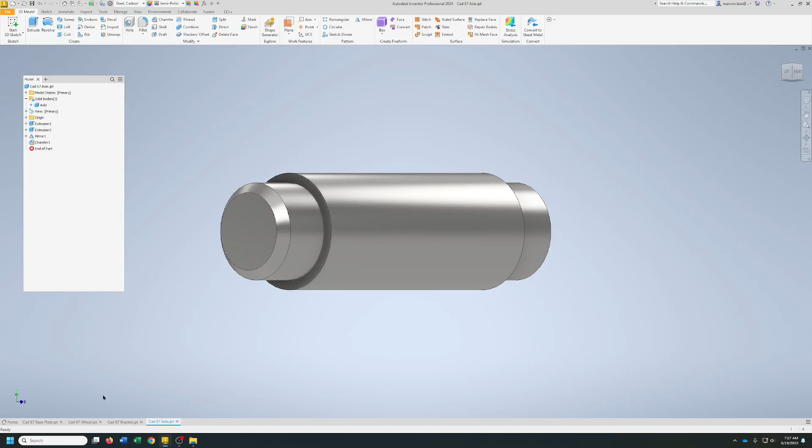I'm pretty new, and this is all metric, okay? So you need to do that, and we're looking for standard millimeter or IAM, which is an assembly. So we'll create that assembly.

Right now it's called assembly 1. Let's go ahead and save this, and we'll call it CAD 67. All right, so it's saved as CAD 67.

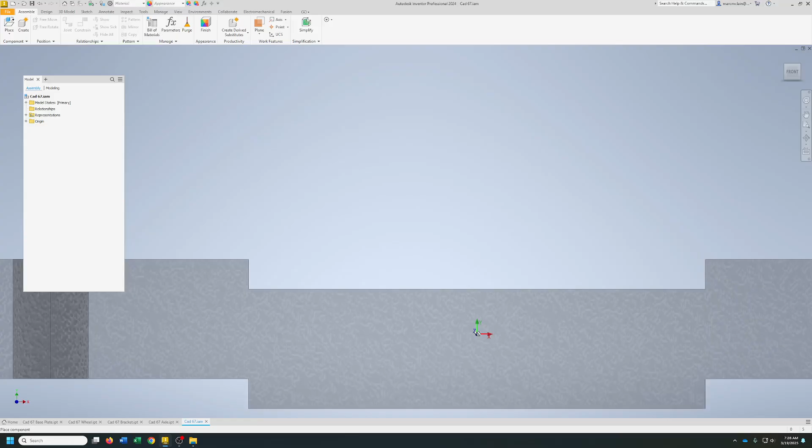Now we're going to place. Pick that, and the first thing we want to do is go back and look. See, I've got them all listed. You'll notice each part has a number. Part 1 is the base plate, so that's the one we're going to bring in first, right here. So we'll just open that and place it. And there it is.

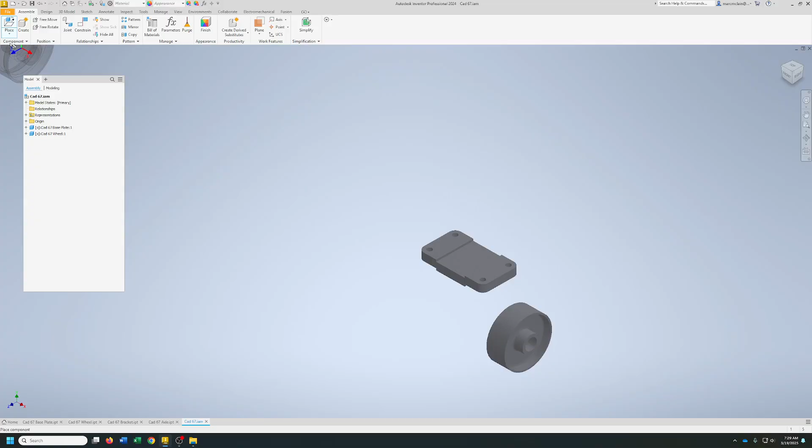Now we'll hit place again. We'll get part 2, which is the wheel. And we'll place that, and so on until we have all our parts in. Now you need 2 of the brackets, and then the axle. And there's all our parts.

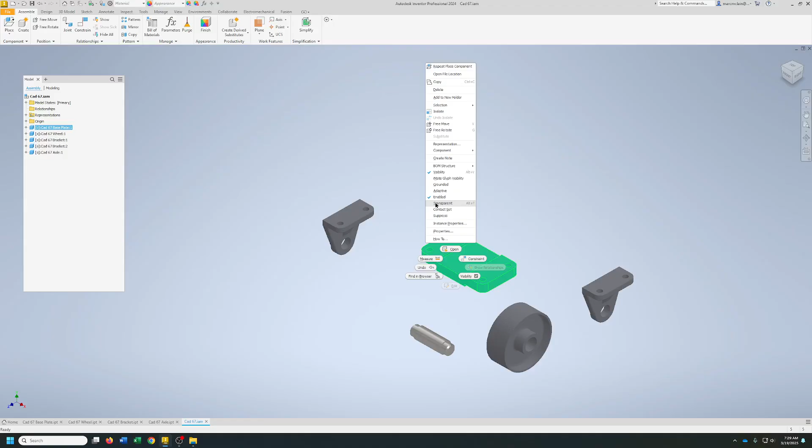Now your first part is where everything's going to attach to, so we're going to pick that, right click on it, and then grounded is what we want. What that means is this part will stay right there, it does not move, does not go anywhere, which is exactly what we want.

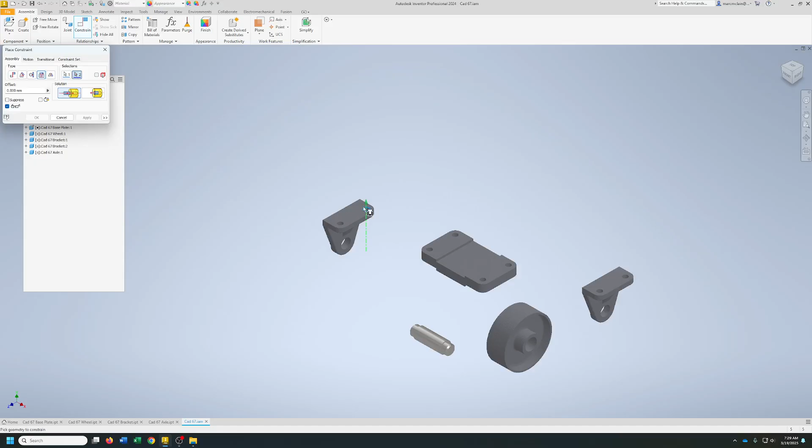Now we're going to attach this to here. Constrain, and we're going to use an insert. Pick the parts you want to move, then pick where you want to move it to. So we want that insert to go right there. And there you go, now we're going to apply that.

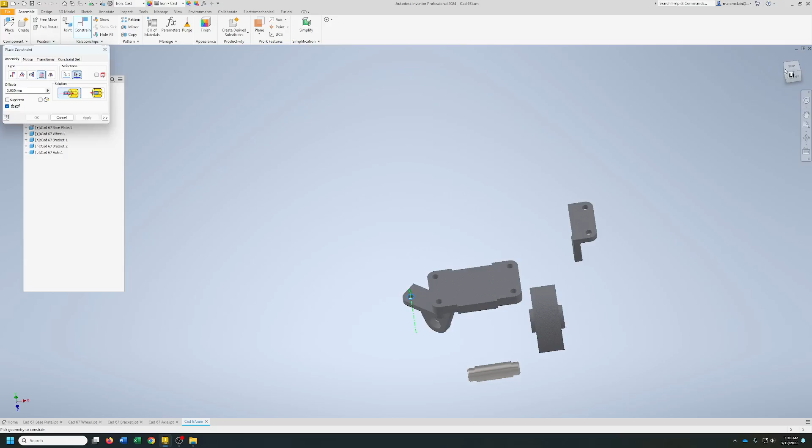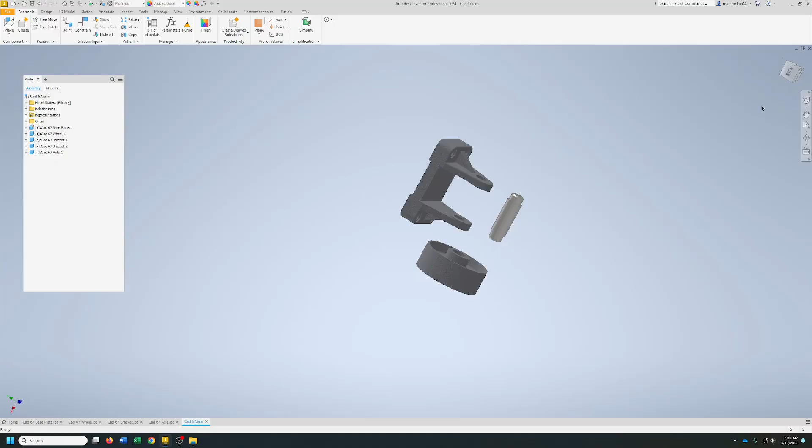See, it'll turn around that spot. All right, so we're going to do the other one to that side. Now we want this one to go the other way. Turn that out a little bit so that I can get to the hole. And there we go.

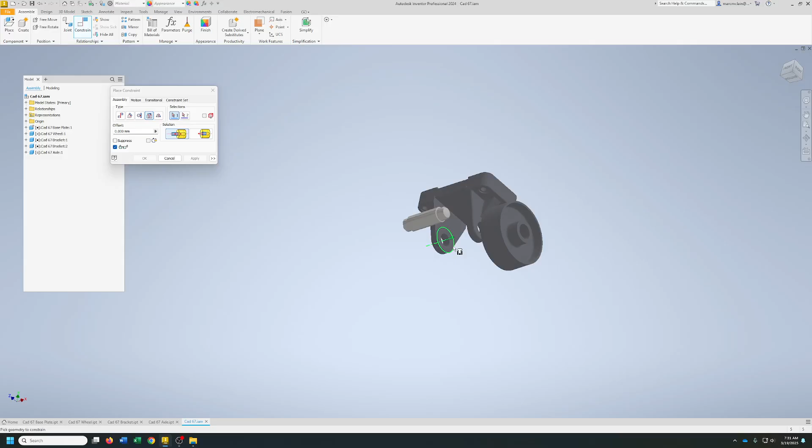Now we got to get this here. All right, so let's do a quick inspect and measure.

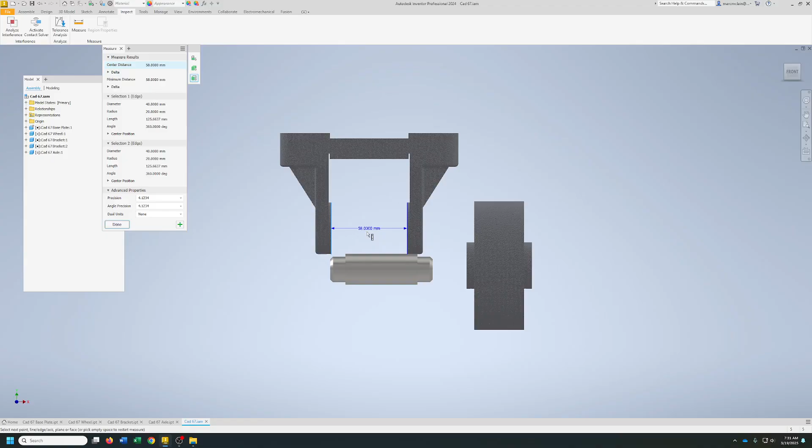That's 58. Now this is 55 from here to here. So that's a difference of 3, so it's going to be 1.5 on each side. That's important because we're going to have to do an offset.

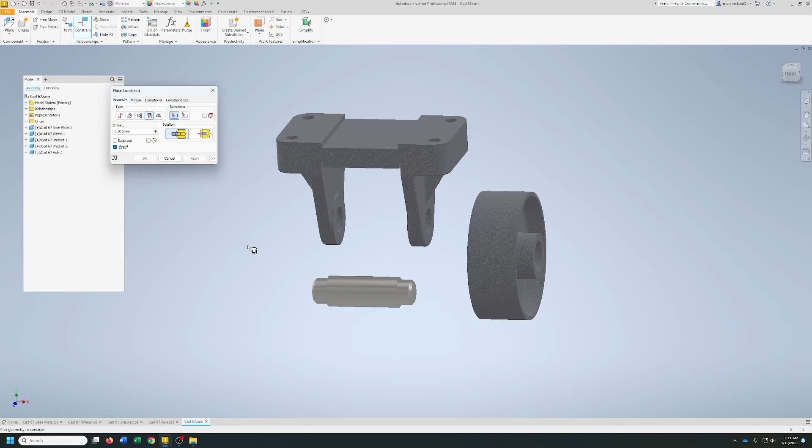All right, so back to assemble. I'm going to pick there, and then we'll pick there. Offset's going to be 1.5. See how I scooched it over a little bit? We'll hit OK. Now that should be, yep, right in the center.

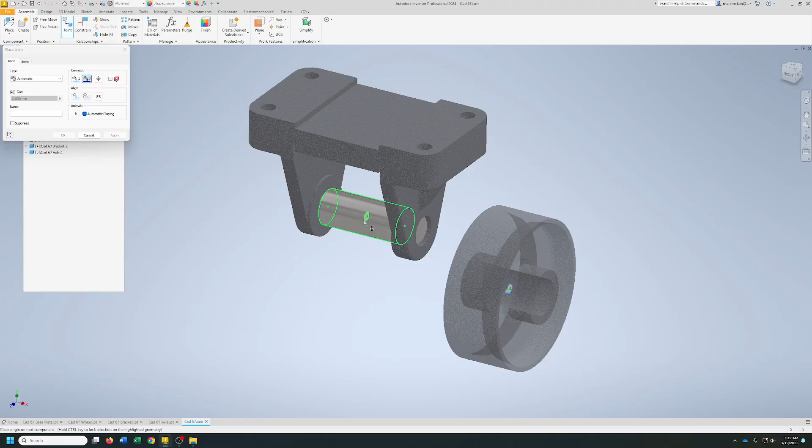Now we got to get this in the center of that, and the way you do that, we're going to use joint. Try to get that middle one. Oh, come on. See how it's highlighted? And then just apply. All right, and there's your part.

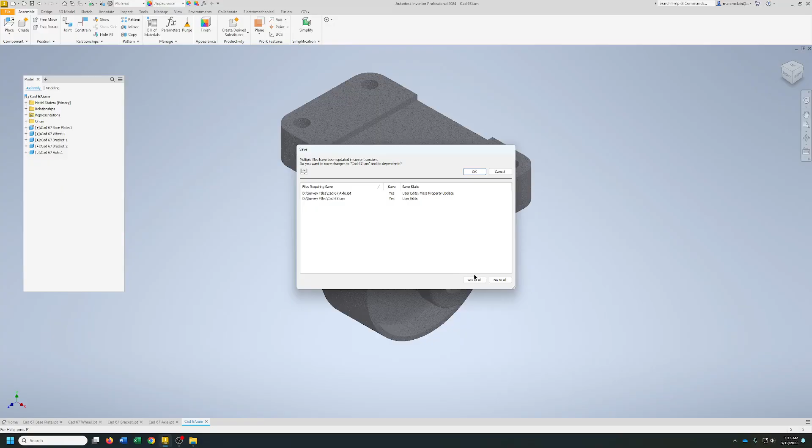Everything's all together. All right, so we'll save that. Make sure you save everything. Yes to all, any user prompts or anything for all the pieces and whatnot. So there's that. Now we got to lay it out.

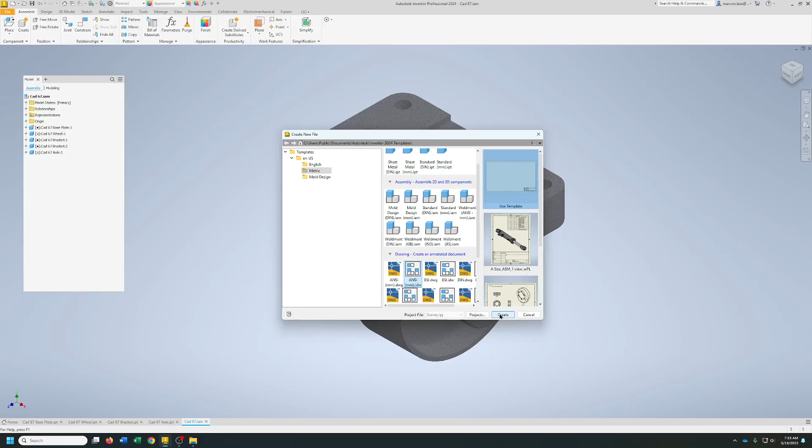What you want to do is lay out each part individually, and also lay out the whole thing. Once again, metric, right? And it doesn't matter that one or this one, either one works. All right, so let's leave it big for now.

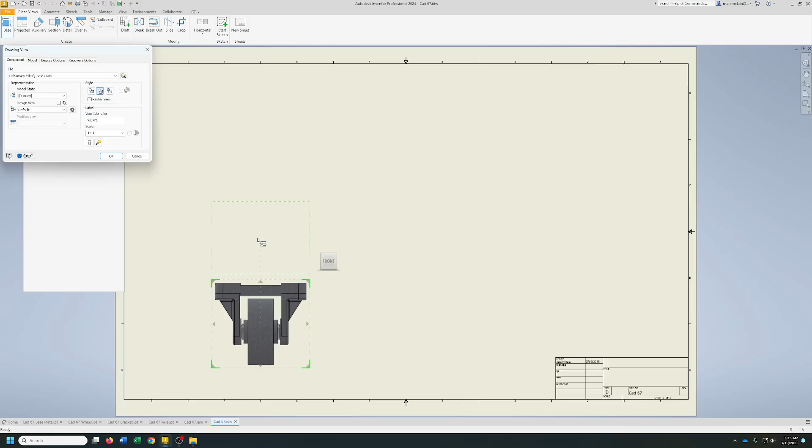I'm going to go ahead and save this, CAD 67. Base view, let's get this bad boy on there first, okay? Now I want the top view, and you'll see why in just a second.

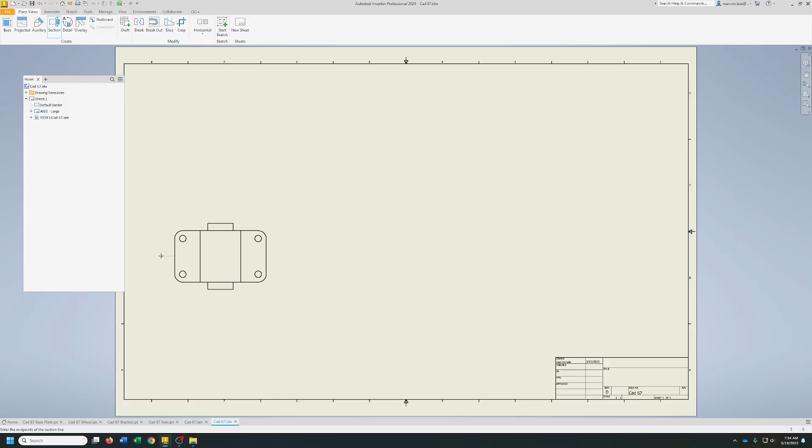All right, let's pull that back up a little bit. There we go, so there's my section cut. All right, so there's my three views. Now I don't want this in here, so I'm going to hide that bracket.

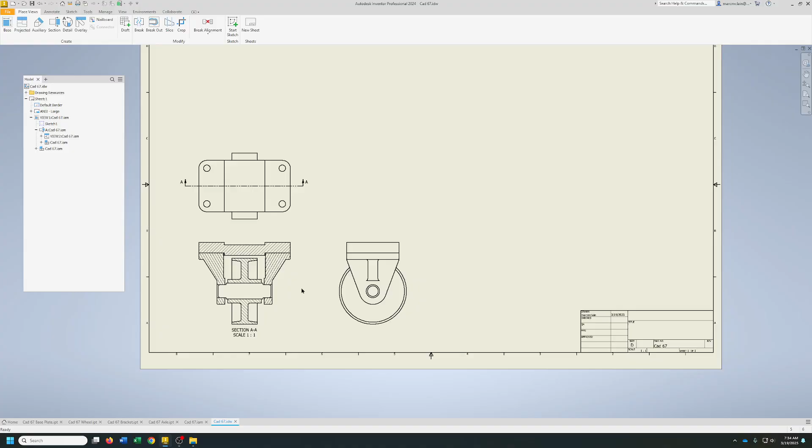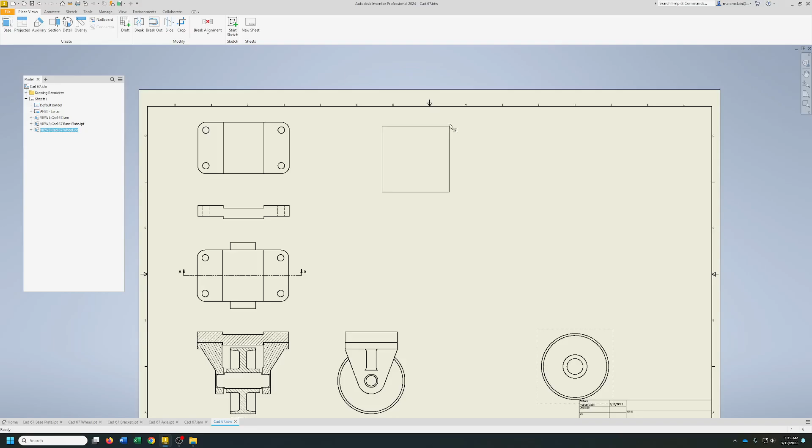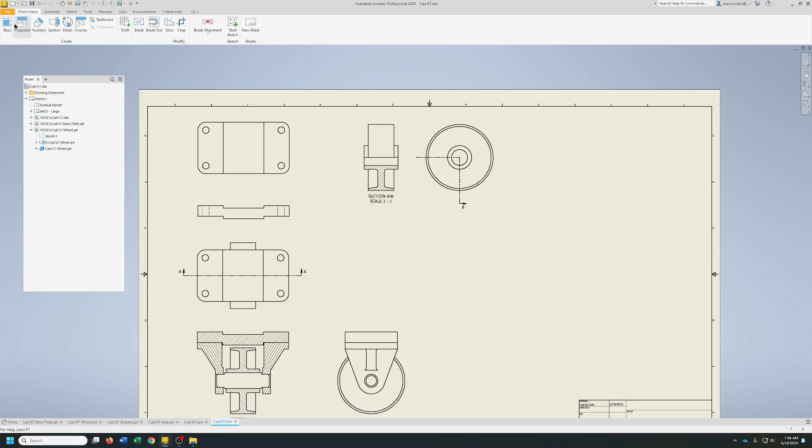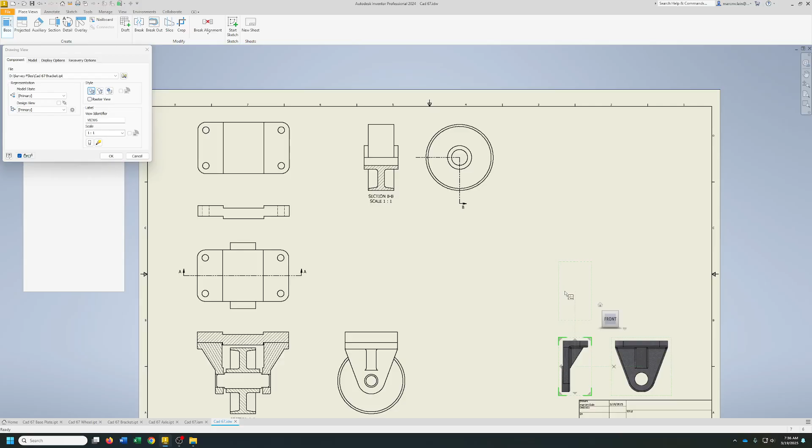All right, so now there's all my parts. There's those. Right side. So that'll allow us to get all these like we need to. So we got the base plate, the wheel, the bracket is not the last one, but bracket is next, and the last one we're going to load up on here is going to be the axle.

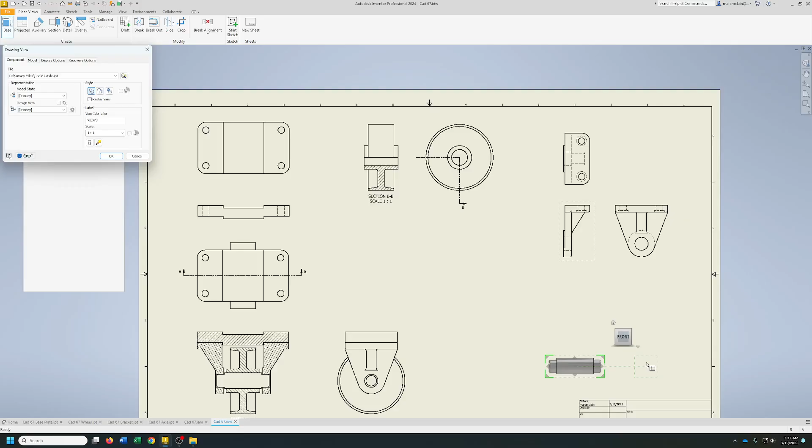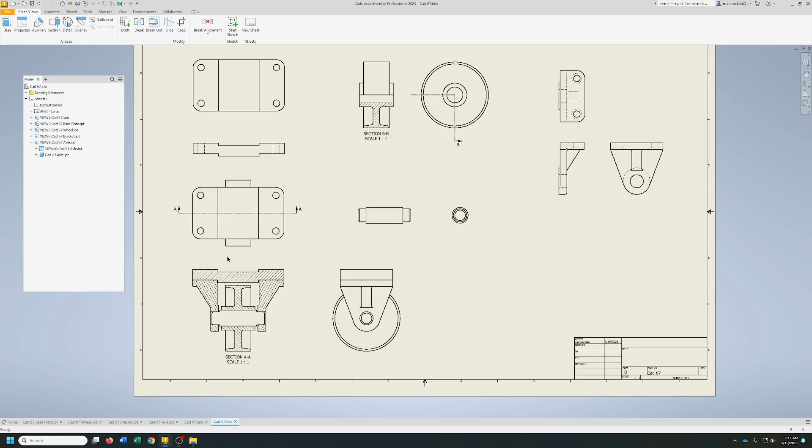All right, save that real quick. Now I need a parts list, so I'm going to come over to annotate, parts list. I'm just going to pick this. Hit OK, hit OK to enable the BOM view. Pop your parts list right there.

And as you can see, it tells you what the item number is, how many there are, what the name of it is, and you can put a description if you'd like. And there they go.

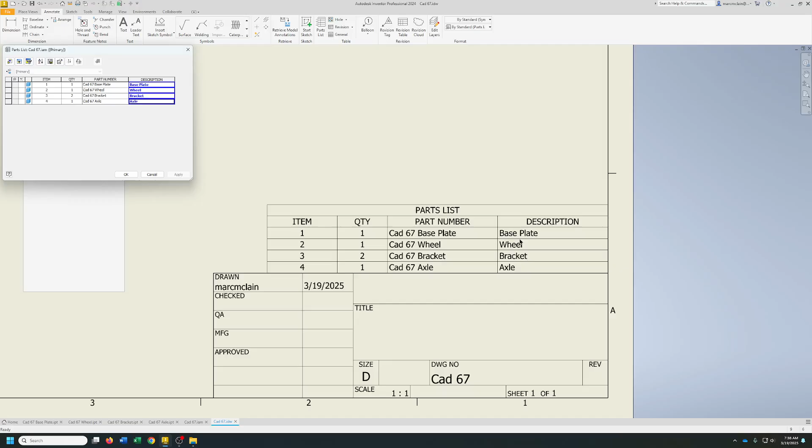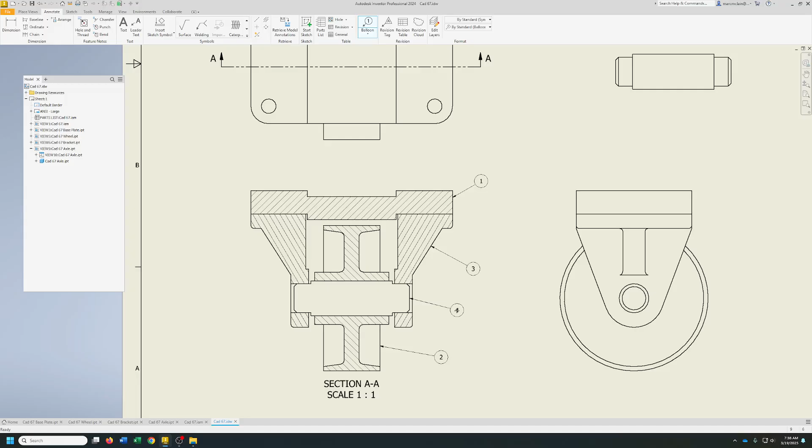All right, now we're going to put balloons on this to call out which part is which. So just go to balloon, pick your part, click, hit continue, and it'll label it. And you just dimension it as normal.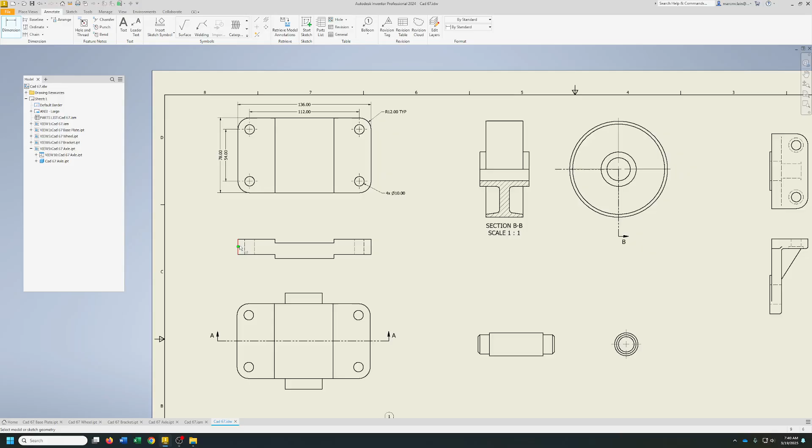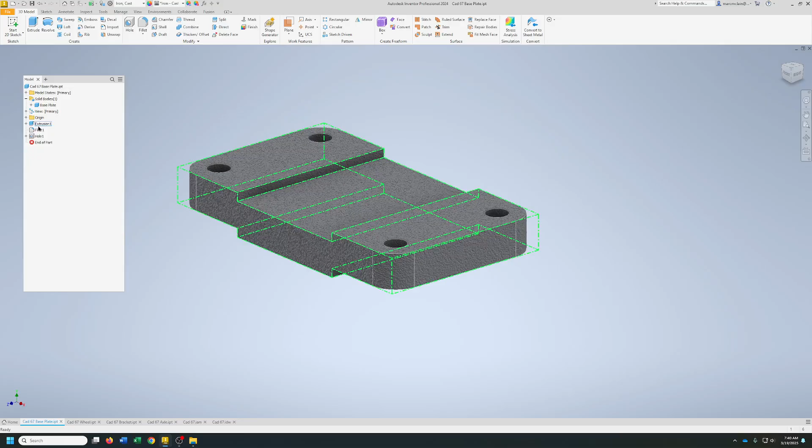Ah, that's only supposed to be 12. So here's what we do: open, that goes to this one, okay? So I'm going to go back to my extrusion and go to make my sketch, edit sketch. All right, so that's not going to work, so back up we go.

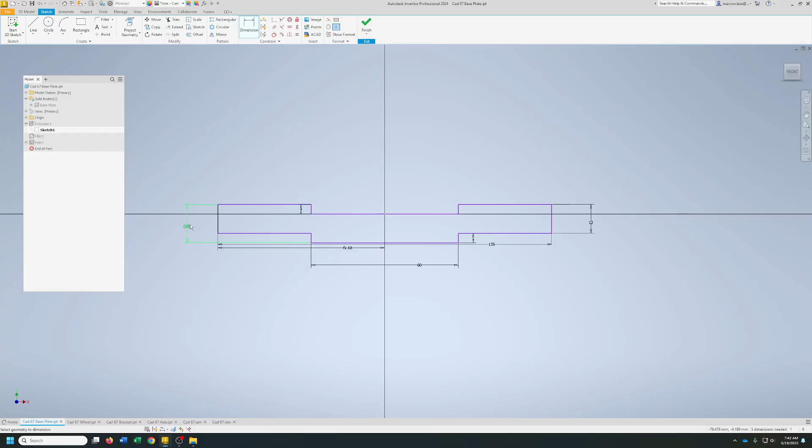Well, it is what it is, we'll go ahead and finish that. That's good. And save it. All right, so we're updated.

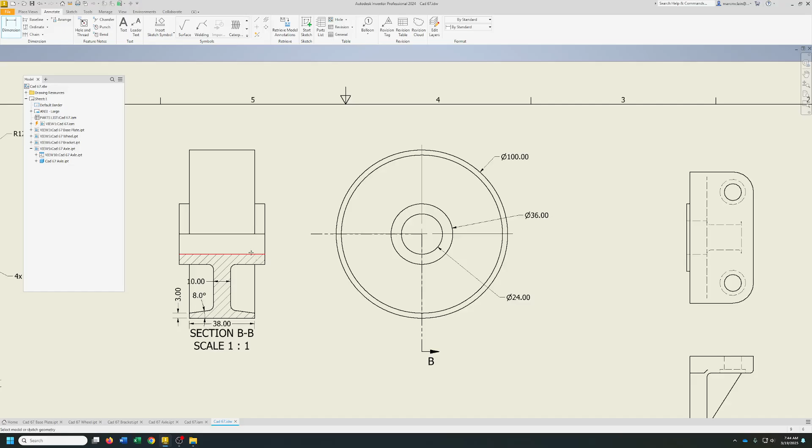And you just keep going until you get it all dimensioned. All right, you see how these are dashed like that? So what we're going to do is we're going to change things a little bit.

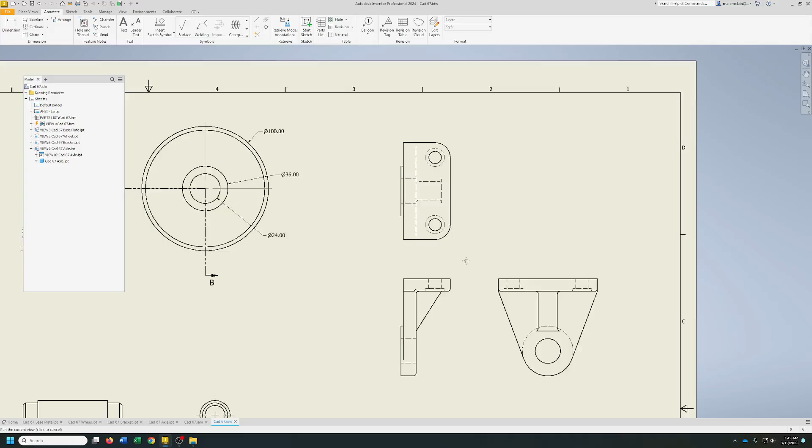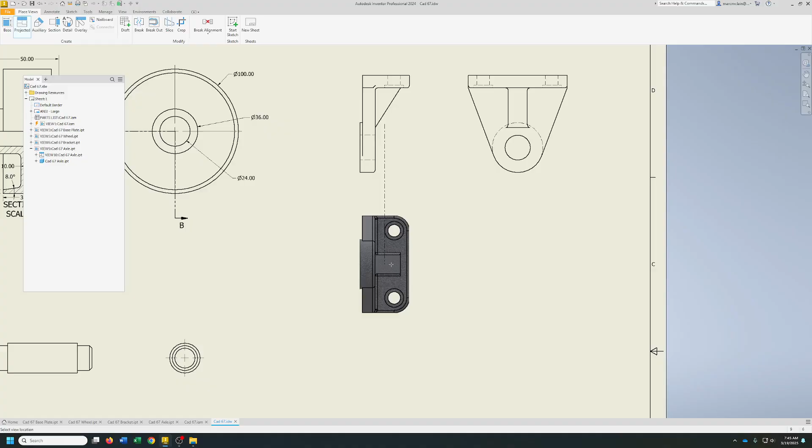Instead of doing a top view on this, we're going to do a bottom one. So delete that view, and we'll pull both of these up. Go back to place views, do projected, and we'll pull one down here, like so. That's just so we can show that.

Now, go to annotate, hole and thread, pop that one. All right, and then back, ready to dimension.

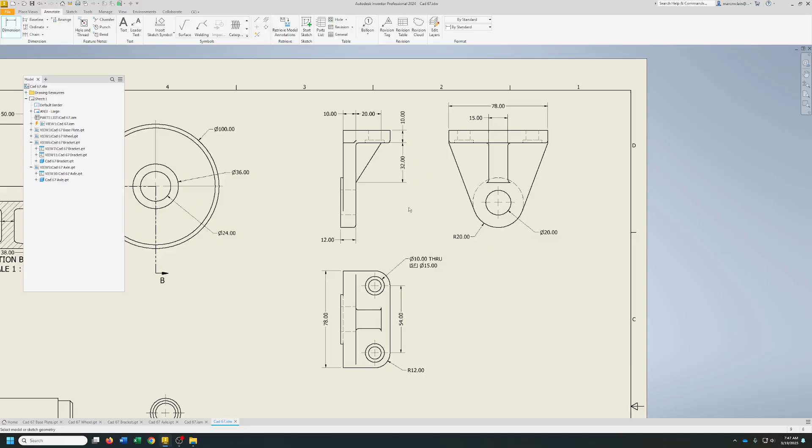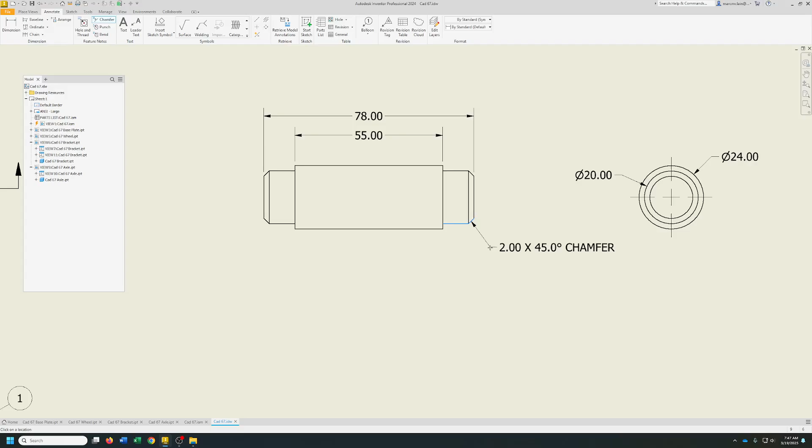And let me finish this. And that's got it, all right.

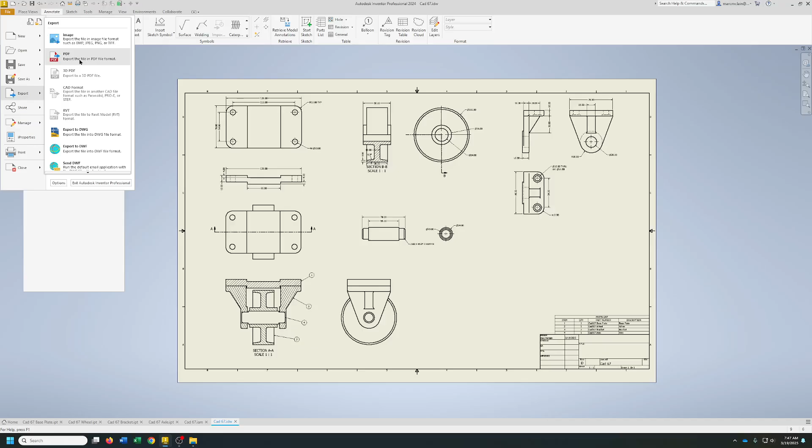Go ahead, save that, yes to all, hit OK. And then don't forget, export PDF, and that'll be CAD67 PDF. Save that, and we're done. All right, we'll see you for the next one after this.